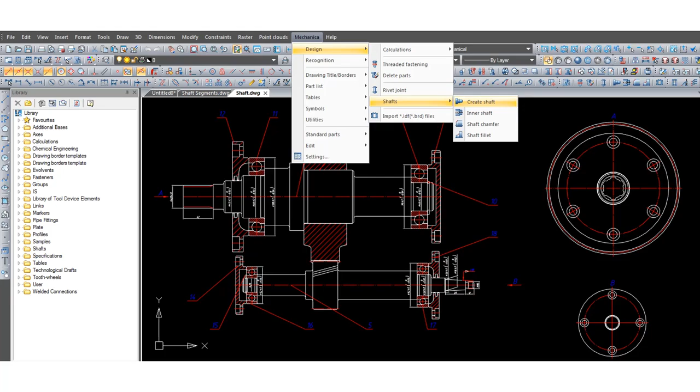nanoCAD Mechanica is a DWG-based mechanical detailing package designed for MCAD applications. It runs on top of nanoCAD Pro, and it can read and write DWG files, as well as create regular drawings, just like nanoCAD does, as well as drawings made from parametric parts. It supports a variety of international standards and has constraints and multifunction grips.

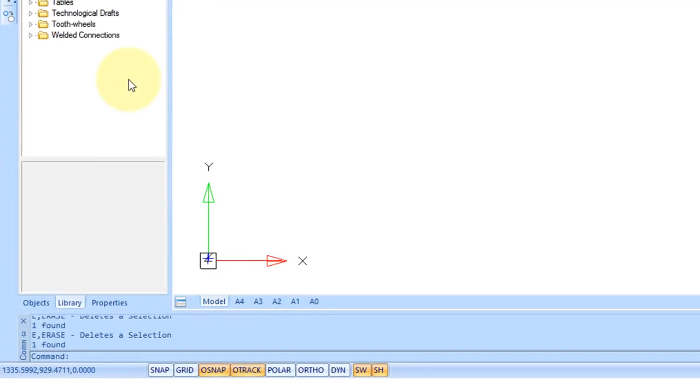The heart of nanoCAD Mechanica is the library, and if you don't see it, come down here where the tabs are and choose it. When we look up here, we see a long list of parts and other things that are useful for mechanical design.

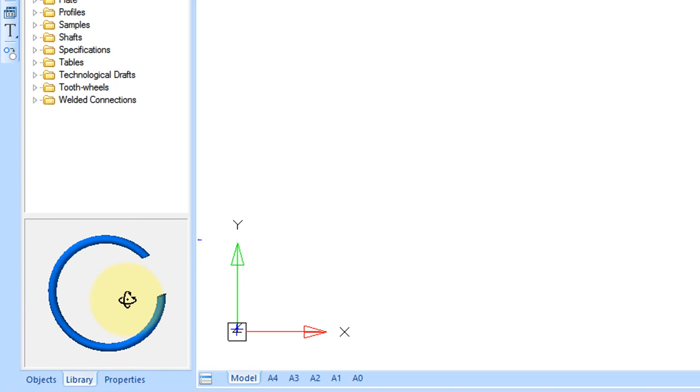Let's take a look at one particular one. Click on this thrust ring, and if you come down here in the preview area, you can hold down the cursor key and rotate the item to see it from all different angles. Now we come up here to position it in the drawing with a click, and then we rotate the angle. Hold down the shift key to get it at 90 degrees orthographic mode.

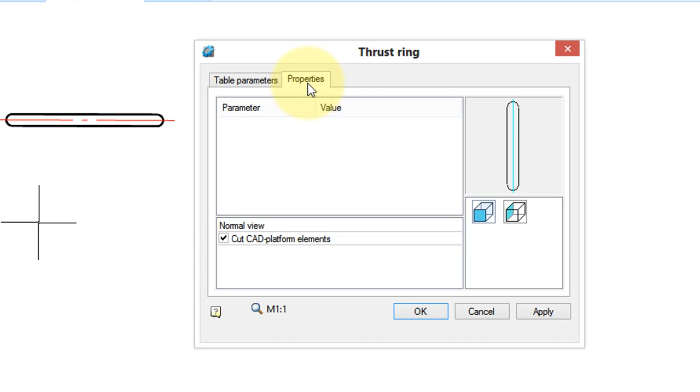Click again, and up pops this dialog box with the different diameters, so I can choose a larger diameter, click apply, and there it is, as well as the different viewpoints. So this is the front view, click apply, and there we are. Command automatic repeats, press escape to stop.

Now if you want to change this thrust ring afterwards, move your cursor over top. It displays a description of it in a tooltip. Click the edit, and up comes that dialog box again, and then you can again change the size.

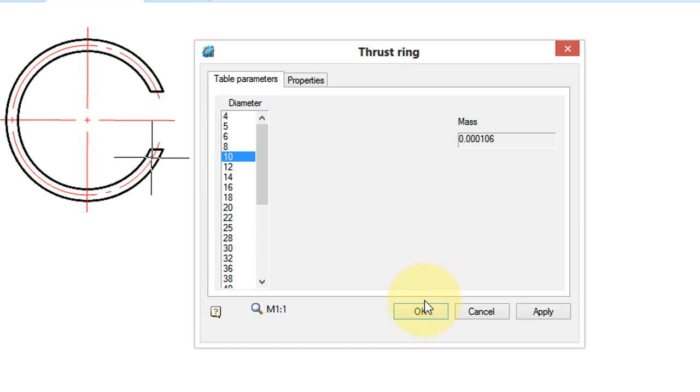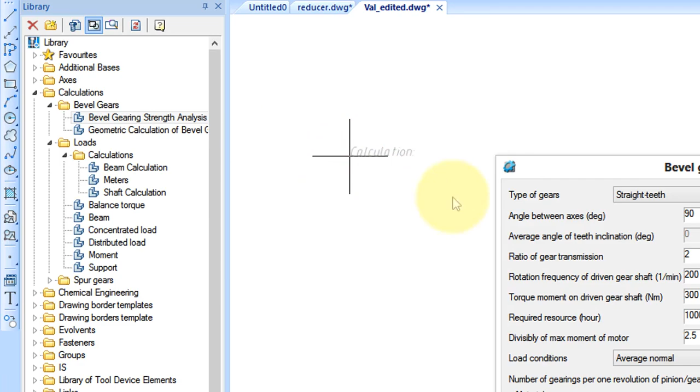Something else valuable that's found in the library are calculations. So you can click here on calculations and see the different kinds. And this is how it works. Click on one and find a spot for it in the drawing. And now you can fill out all the parameters for this particular one, which is a bevel gear.

Click analysis, and there's the results. And then you can click OK, and they're right there. Now when you double click this, you come back to the dialog box. Click back to make changes.

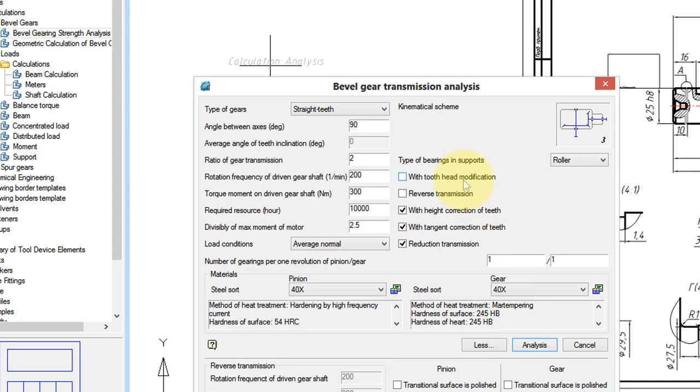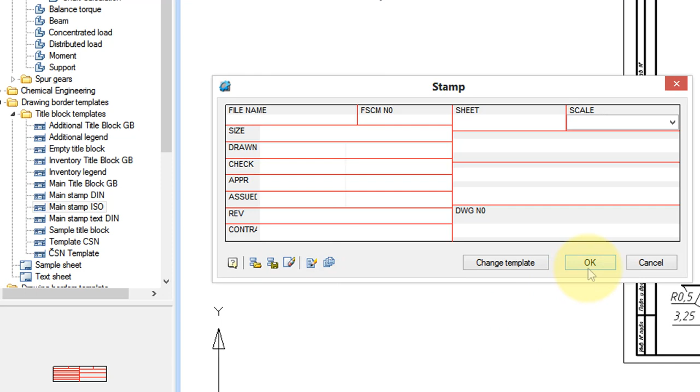Down here you have some icons. This one saves the values as a default. This one clears the values. And when you click OK, it's inserted. To edit it, double click, and back comes the dialog box.

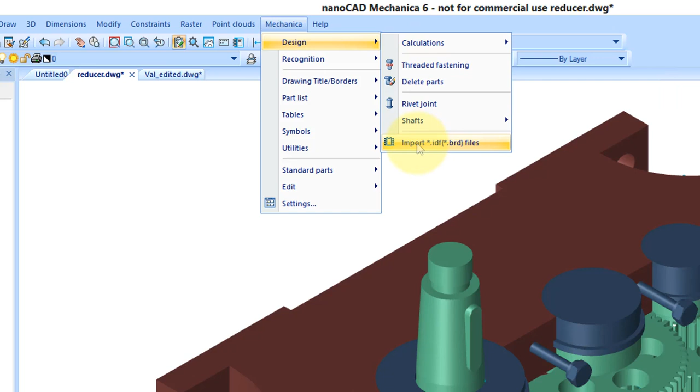Now I'd like to show you the Mechanica menu, which has a lot of important features in it. Let's click on it and see what we have. Under the design, we have calculations, which we saw in the library palette. And here's where you would import files from PCB design software such as OrCAD and PCAD.

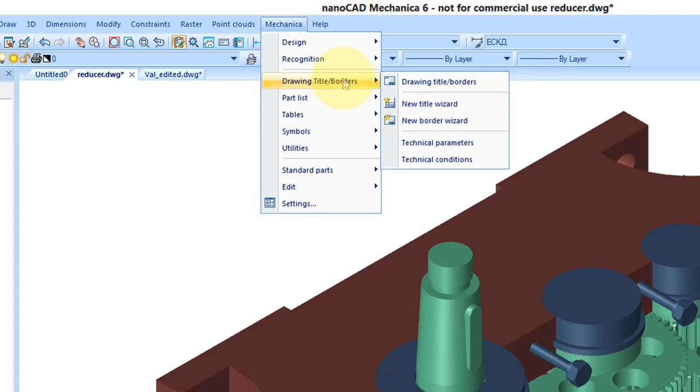The recognition menu will convert lines that you may have drawn or someone else may have drawn to form tables or drawing borders, and it will then convert them into actual tables and so on. Here's where you can create new borders and titles, do parts lists, create tables, as well as export and import to and from Excel and convert tables from AutoCAD.

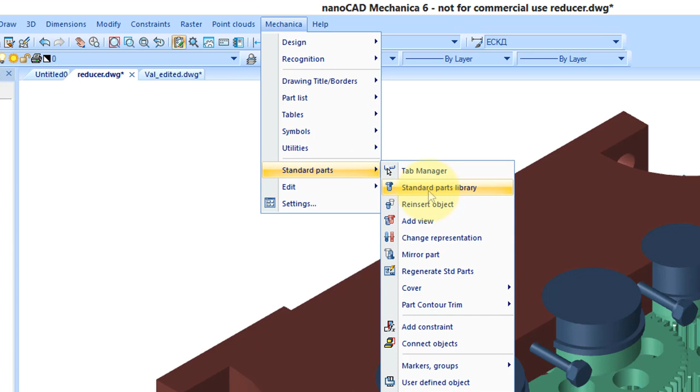Here's a whole bunch of symbols that you can place into drawings, number of utilities, for example, draw different kinds of break lines, construction lines, center lines, and so on. Here's another place to access the parts library and to edit them. Edit menu does things like edit groups and blocks.

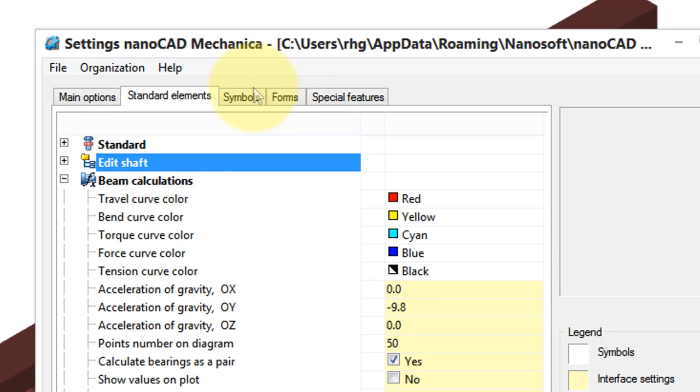Here you can specify what symbols look like, for example, which layer to place dimensions. Here you can specify borders, once again layers, text styles, and so on. And here are options for what happens when PCB drawings are brought into Mechanica.

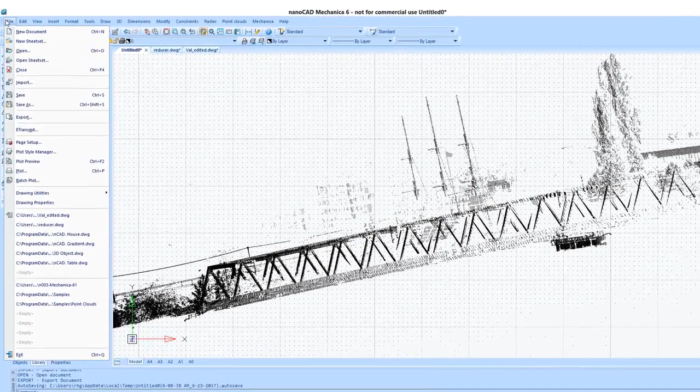Mechanica reads and writes AutoCAD drawings natively, and it even opens up sheet sets, which are multiple sets of drawings. When you need to work with drawings that are still on paper, you can bring them in as raster images. Mechanica has a range of editing options to fix up the poorly done scans.

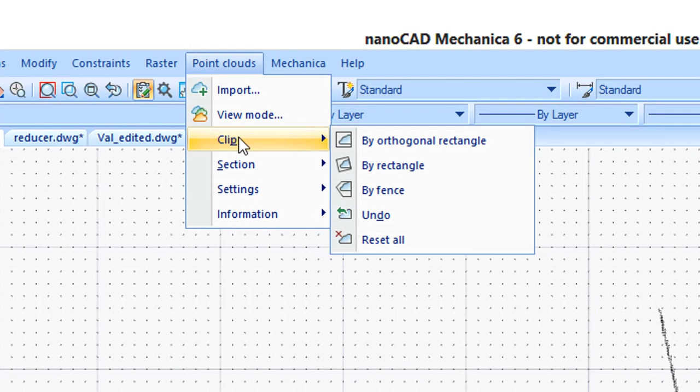It also imports point clouds. These are 3D scans made on location, and then you can trace over those.